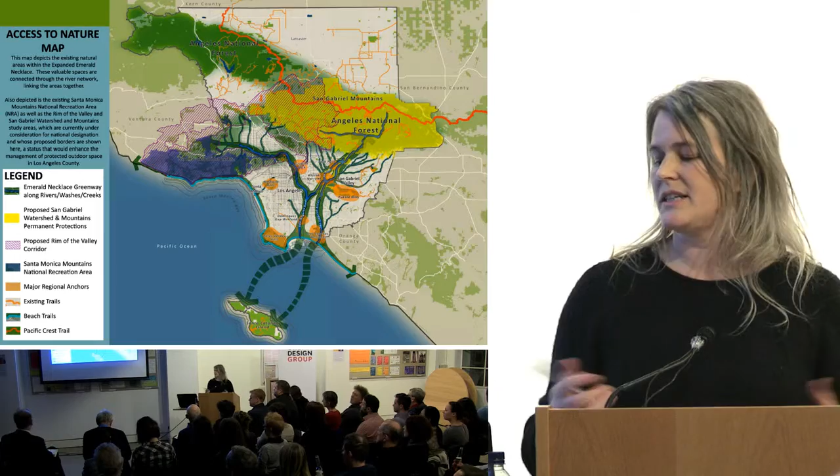This is one of the things we're becoming more involved in: retrofitting natural systems within the city and bringing back into play redundant spaces. This is one of those corridor systems, which is actually what green infrastructure is based on—the corridor concepts that came out of the greenways movement in America in the 70s and 80s, forming critical habitat connections. But green infrastructure now offers a much more expansive concept, tying into mosaic parts including forest, fen, marsh, things that deliver ecological services as well as other benefits.

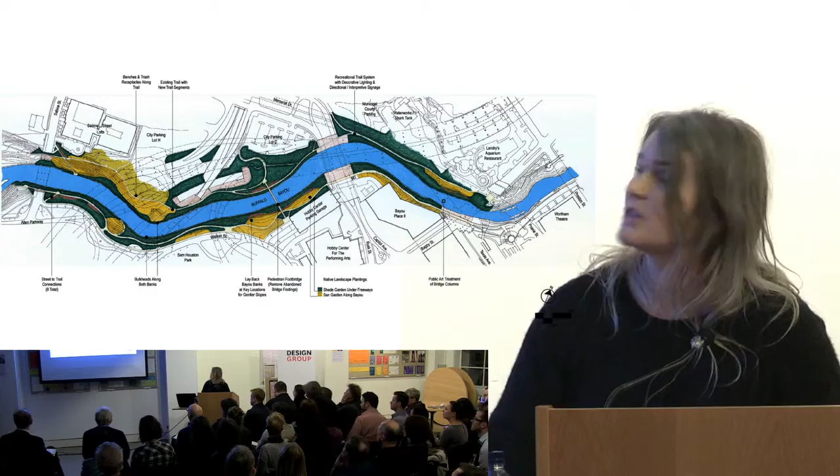In the section they looked at, they regraded all the banks, brought back the riverine and riparian vegetation, turned dead spaces into positive spaces, and connected everything up, working with the local microclimate and the areas that would be shade and the areas that would be in sun.

There's a before and after of how the bayou, the creek, was, and how it is now, with multimodal forms of transit for cyclists and pedestrians, a large campaign of tree planting, and bike trails that take you right into the centre of town. New businesses have opened up, renting kayaks and canoes to people for exploring and recreational and educational opportunities.

That just enables something much more than the sum of the parts, which is a greater response from community and spaces to live out the lives that we have to live.

So just another example, and perhaps an even more extreme example of degradation. This is Turenscape's project in Qian'an City. It's the Sanli River, which had become extremely toxic and degraded after decades of steel industry. The plan shows the three sections of the river—well, it's a spur of the river—as it goes through Qian'an City. And this is what it had become: a wasteland and a rubbish ground.

It's been brought back into play through riverine restoration, ecological principles played out through the whole corridor, enabling new forms of recreation as well as cleansing of water, new meeting places, new opportunities as the river widens and leaves the city. It's something quite astonishing, achieved in just two years.

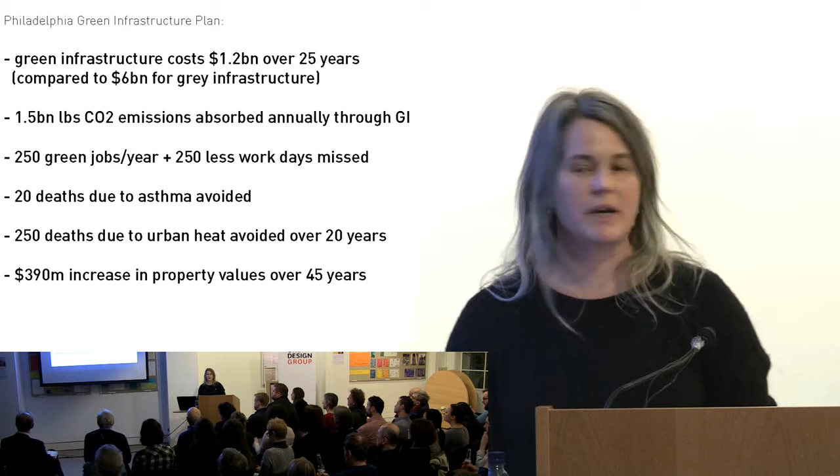In fact, Nesta produced a report about new models of management in 2013. We need to be cognizant of this, because as we plan these spaces, we need to know that they're going to survive.

So one of the aspects is that we're approaching tipping points, and obviously there's always an opportunity in a crisis. This is from the Room for the River project in Holland, which many of you will know. There are 30 projects, all scheduled for completion by the end of 2016. This is one between the towns of Lent and Nijmegen. Nijmegen sits at the bottleneck of the River Waal.

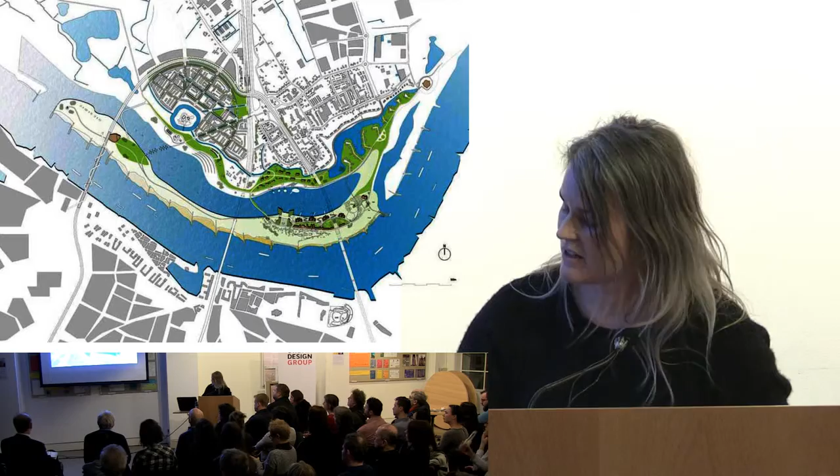So that was the drawing that won the competition, from H+N+S Landscape Architects. And then a visualization of the same. This is happening across the Rhine Delta, which is at that cutting edge, and I think the Dutch have been ingenious in their ability to think about this, plan for it, and absorb these issues. And there it is in construction - they're excavating the channel, and I think it's going to be finished at the end of 2015, this year.

Another example of this is the threat to our coastlines. As you're probably all aware, we're losing salt marsh at quite a significant rate as sea levels rise, and they're set to rise further. One of the things we can do is make other sacrificial acts - we can let land go. That's already happening in the UK with managed retreats. So if we can create new salt marsh, we can actually buffer those tidal surges and storm events, and reduce the velocity of the waves and their height by about 20%.

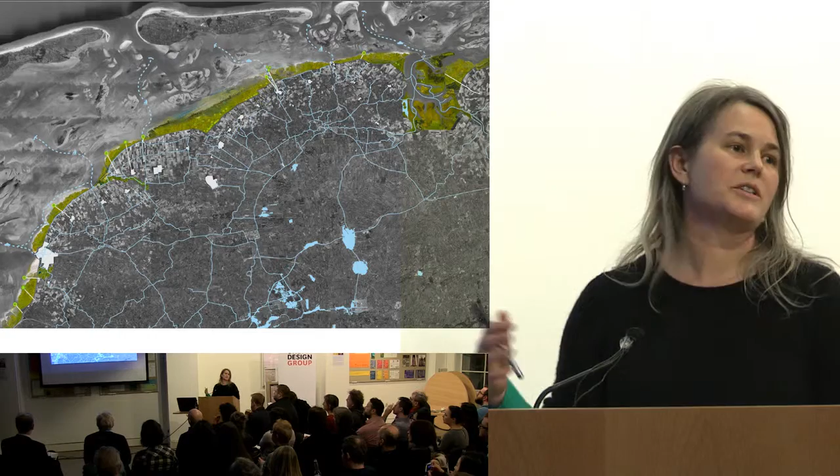But they're obviously not just storm defences. They're significant recharge zones for our hydrological system and networks. They're fish nurseries - it's where fish come to spawn often. But they're also a huge recreational resource.

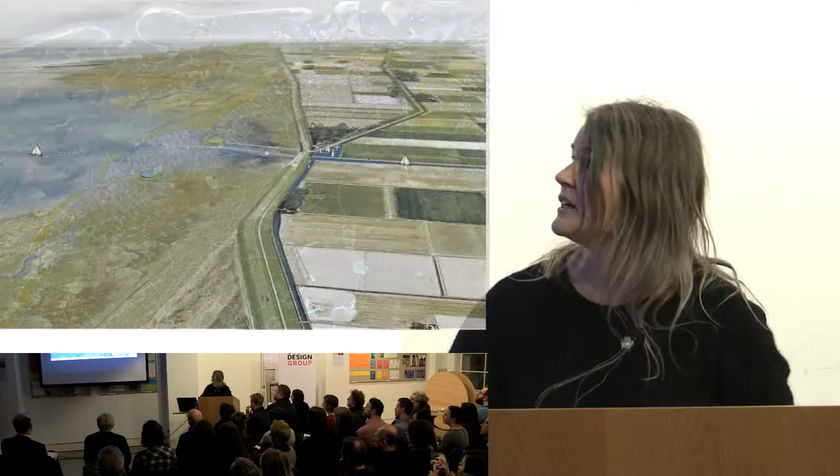So this is on a big scale. This is by Bureau Harrow, another Dutch practice. And that's their vision of that reconstructed salt marsh that provides new protection for the urban centres along that coastline, which is in Friesland.

And then a student project from Christophe Girot's unit at ETH Zurich, where they're exploring similar problems. It's about protecting the delta, but by sacrificing land again, we can make space for the water by relaxing the pumping regimes within the polder landscapes. We can have some kind of coexistence, but it requires giving up something we had before to enable these new models to emerge.

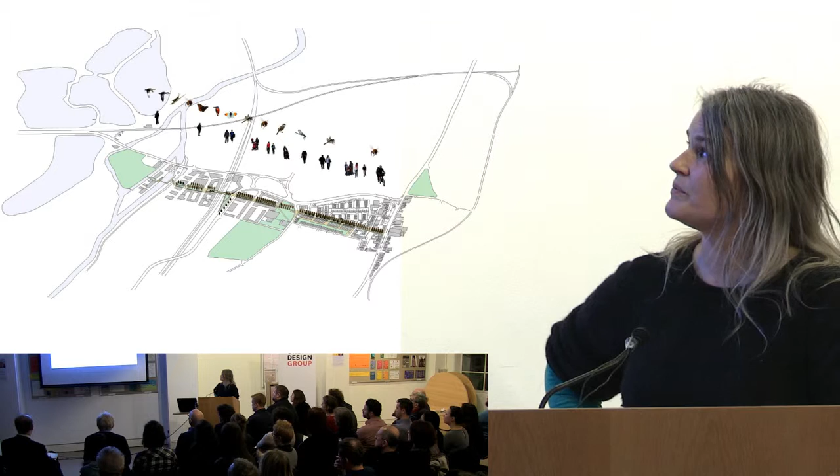So I'm just going to turn to some of our own work. This is a sort of icon of one of the projects we've been doing in recent years. This was for Design for London. It's a connection between Tottenham High Street and the Tottenham Marshes in the Lee Valley Regional Park. The idea was to create a new pedestrian and cycle-friendly route that connected the marshes with the high street and enabled migration of species along that, both human and otherwise.

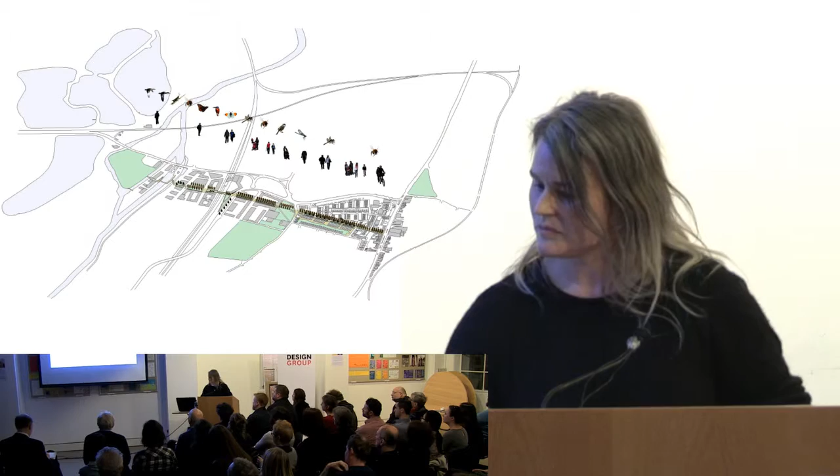But using a system of rainwater collection, recharging that through swales and rain gardens, and allowing that marshland landscape to come up and take a hold on the high street. And what that would create is a kind of river of flowers and a biodiversity chain, which would help pollinators.

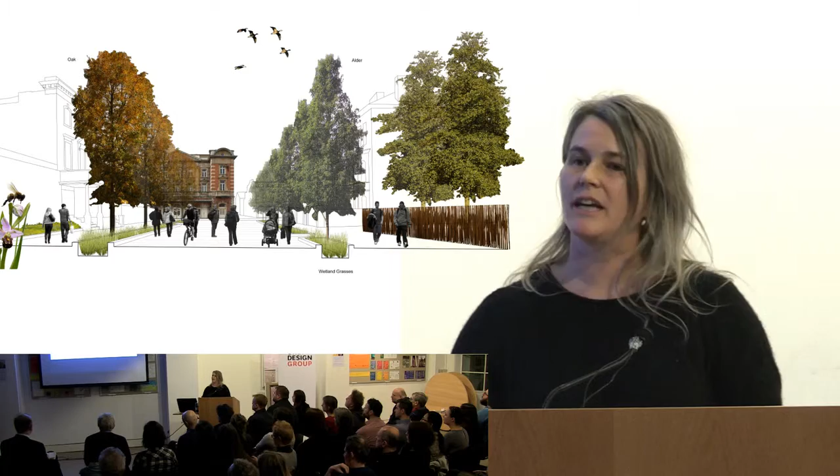And I think this thinking is all underpinned, and that was part of an ALGG project within the All London Green Grid. But all this thinking is underpinned by the rhizomatic structures that probably arose out of the early work of the 1960s of Design with Nature, with Ian McHarg's work, which has informed my generation of landscape architects and has informed the making of the ALGG.

It's a kind of spreading system. It's about creating the connectivity within the city that enables these systems to thrive.

So in an area that we're also working in, Thamesmead in southeast London, which is a former marsh and a flood risk area, we're looking at one of the critical connections between Lesness Abbey Woods and the Crossness pumping station on the riverside, that takes us through an area of 1970s development, which is Thamesmead.

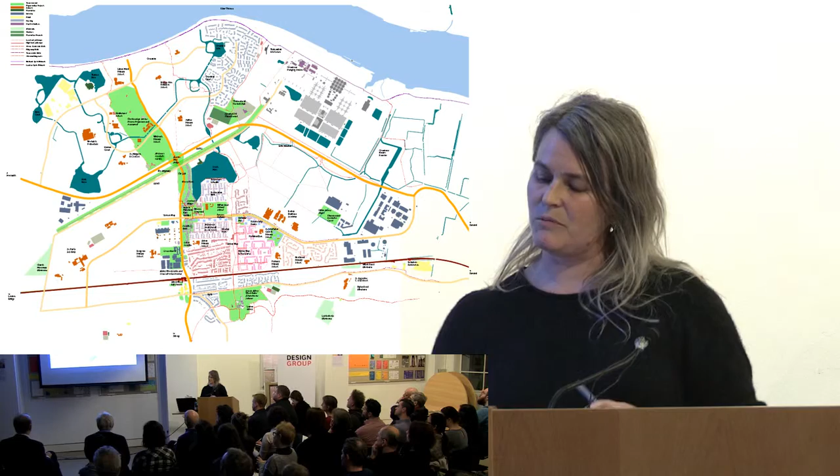This is a kind of mapping of those connections of routes and development, and then the network of open spaces that interconnect with that network of routes.

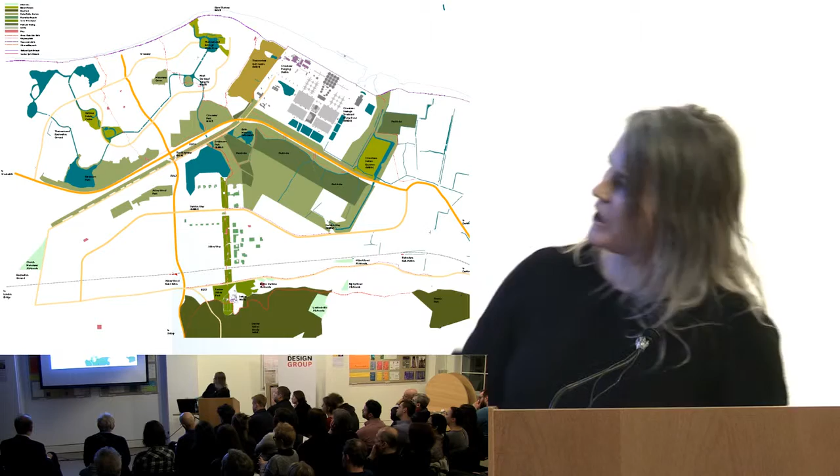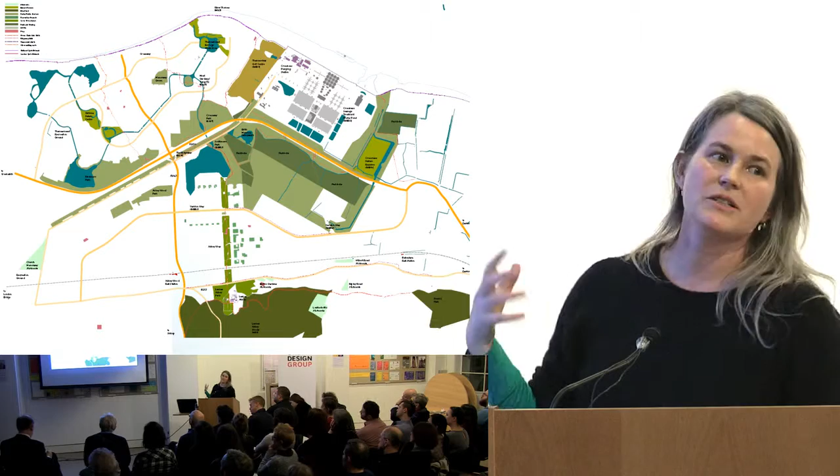We're actually working specifically within this very thin line that goes up to the lake and then crosses the Ridgeway, which is South London's equivalent of the Greenway and Bazalgette's sewer system that links in with the Victorian Crossness pumping station. But this is what we have come to, this route, which is actually an escape route

from the marshes, which goes through the brutalist architecture of the Thamesmead development, which is denuded and degraded. And I think that's what a lot of us are finding, that we're working in these situations where things have just been left and there's no money to manage them or sustain them.

So that we have a damaged landscape with inappropriately planted trees. We have travellers' horses grazing on the site that makes it often unusable for other park users, so it isn't really a park anymore.

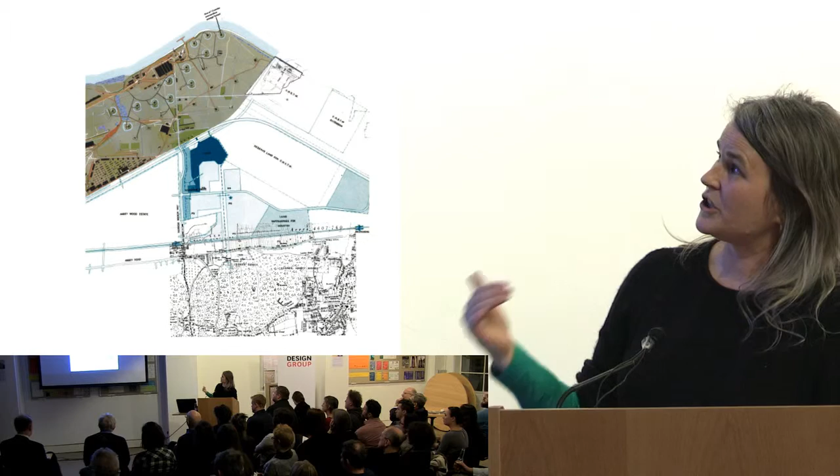And we're also working with time. We're working with the sort of ancient landscape of the woodland up on Lesness around the Abbey. We're working with the old military site from Woolwich Arsenal in the marshes with all the tumps where the munitions were stored. And we're working with the 1970s development of Thamesmead and the Victorian development of the pumping station.

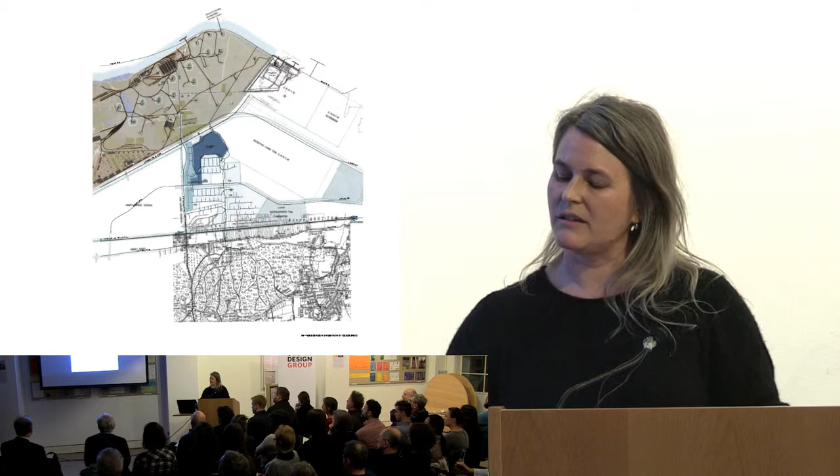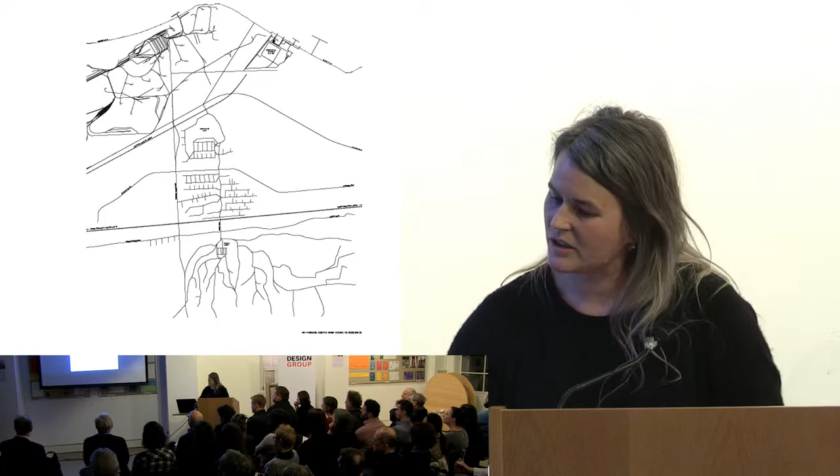And we try to understand that and unpick the system of network of routes and interrelationship between all of those different zones, and draw out of that the essential kind of framework, and then rethink it as a kind of dendritic system that can bring people as well as species along that corridor and out into the wider marshland landscape.

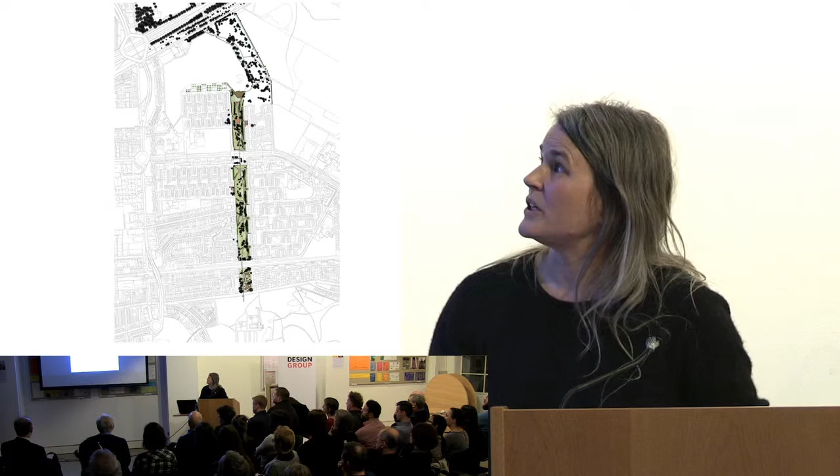And at the moment we're working up proposals. The very tip of this, as it addresses the lake, is about to go on site this week. But we're converting, or we will do when phase 2 is also delivered, about 9 hectares of amenity grassland to

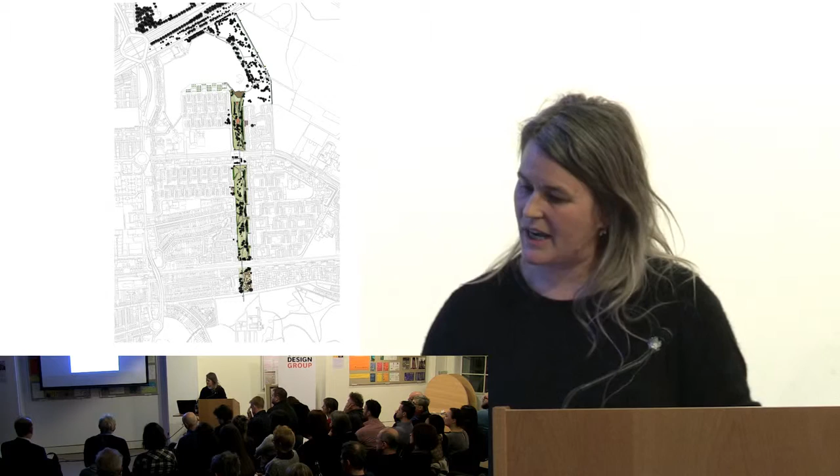species-rich meadow, as well as bringing down the woodland feel of Lesness Abbey Woods, distributing it through the corridor and integrating new access, making it more possible to actually use this space and interconnect with play and other facilities, and a new public square as it addresses the edge of the lake. And that's sort of phase 1 in a rough sketch model, starting to describe those proposals.

And at the same time, we're working with Urban Movement in Brighton. Brighton has been designated Britain's first urban biosphere reserve status through UNESCO, which reflects the amazing wealth of the landscape up on the downs, the countryside, the marine environment, the very particular nature of the chalk downland which sustains all of that, and obviously the city that exists, Brighton and Hove, that mediates those two worlds.

So we're working within that context of a UNESCO Biosphere Reserve, in Valley Gardens, which is the strip of space which reads, as you come down off the A23, feeds down through Brighton and onto the seafront and the pier.

But at the south end we have the pavilion, and also at the north end, St. Peter's Church, which is a Grade 2-star listed building.

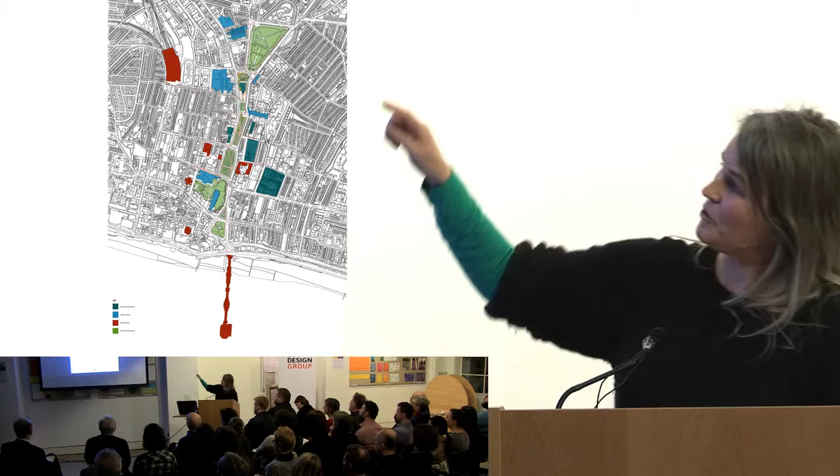And that corridor of space, as it comes down through, picks up the pavilion and past that to the Old Steine and on out to the seafront. So it's about 1.5 kilometres of public realm that we're working with.

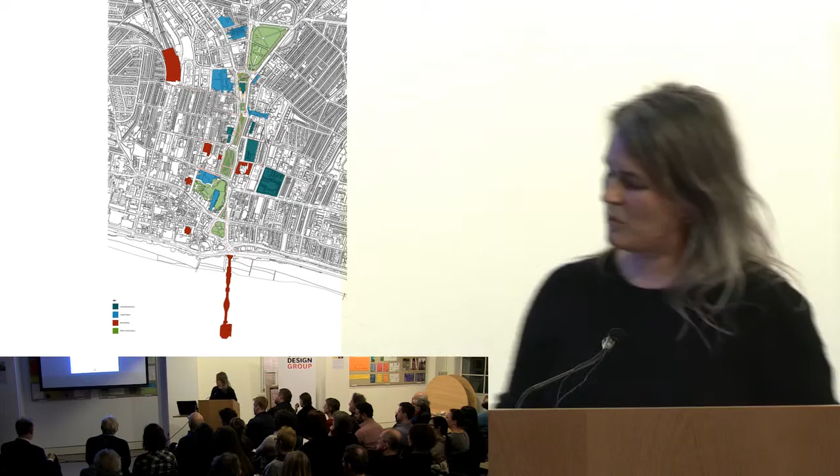This diagram is talking about how things have been severed, how you can't really cross either north to south, east to west, without a whole series of barriers. What we're trying to do, working with Urban Movement, is connect the place back.

It's almost like the fault line through the bottom of the valley. We need to stitch back the east and west side of the city to become integrated through the park system. We need to close down the spaces between the independent garden spaces and make it feel like a linked park system, enabling pedestrian movement up and down, across and along through the corridor.

In searching for the valley, we realised we needed to look at the whole watershed, and we searched for the chalk streams that define that valley system. We found them up on the downs in the spring line emerging from the chalk, but in the valley floor they're not present, because they've been subsumed within the Victorian sewer network. We wondered if that might give a clue to how to start work with what was a marshy landscape, and bring some of that back into the park system.

Those springs were sacralised up on the downs and held to be precious, in the way that they have been held.

Part of the design team included Richard Allitt Associates, consulting hydrologists, who did a modelling study of the whole watershed of Brighton.

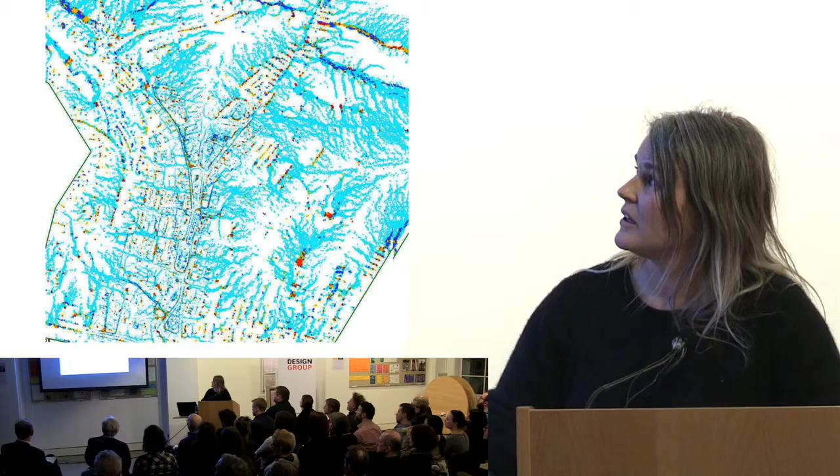It's been raining for an hour now, and the series goes through about 20-minute sequences, so you can see the build-up. Water is starting to gather above Valley Gardens. The yellow is about 15 centimetres deep, areas of pink are about 50 centimetres deep, and you can see it starting to flow down along the roads into the valley.

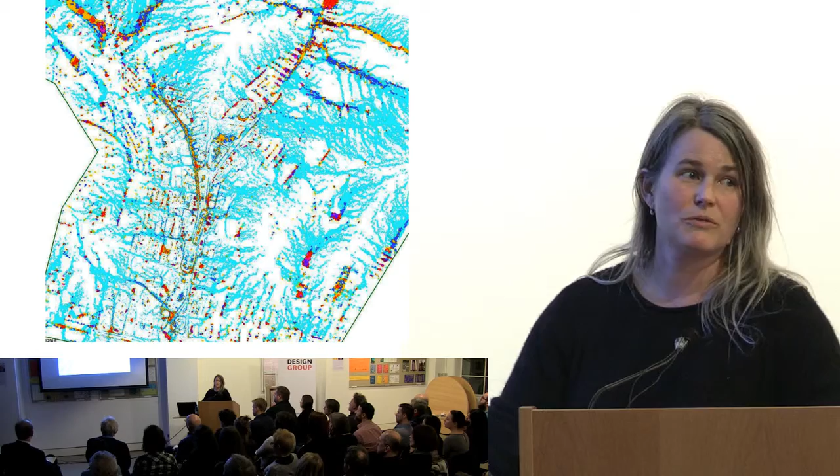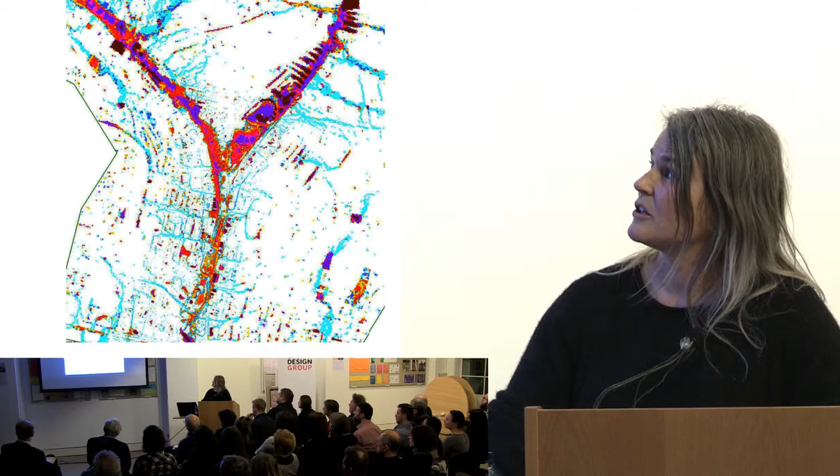The violet is 75 centimetres depth of water, which is beginning to accumulate, and now it's starting to surge. This is all within about a 3-hour period, converging at The Level at the north end of Valley Gardens and beginning to come down through. Where you see patches of brown, that's over a metre. Now I think we've got the full sense of the inundation, and it starts to subside.

What we have, as a result of the work of Urban Movement and ourselves and the whole design team, is a kind of rationalised plan for Valley Gardens, where the street section is closed down on the west side, going from 4 lanes to 2 lanes, taking buses only, and on the east side, a 2-to-3-lane, where necessary, car-only corridor.

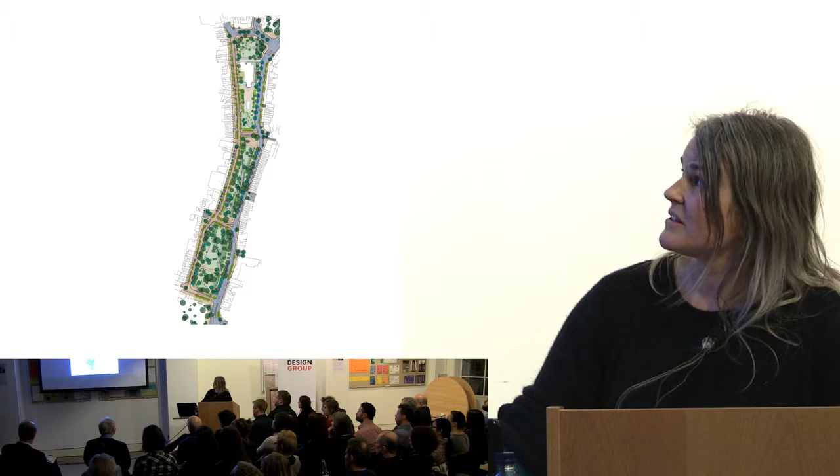That makes more space for streets into which we can integrate new planting, tree planting, swale planting and verges, and make more space for people and businesses.

There's an idea of how that might look outside St. Peter's Church across the east side street section, with widened verges, cycle routes on both sides, off-road, and street swales where appropriate, integrated amongst loading, parking and bus bays.

We've come to this through a kind of layering. We also allowed for an exceedance route which crosses the gardens—it's on the diagonal route coming down. In the worst case scenario, we're hoping we might be able to take water from the west carriageway over to the east and let it go out to sea, avoiding the worst flood risk scenario.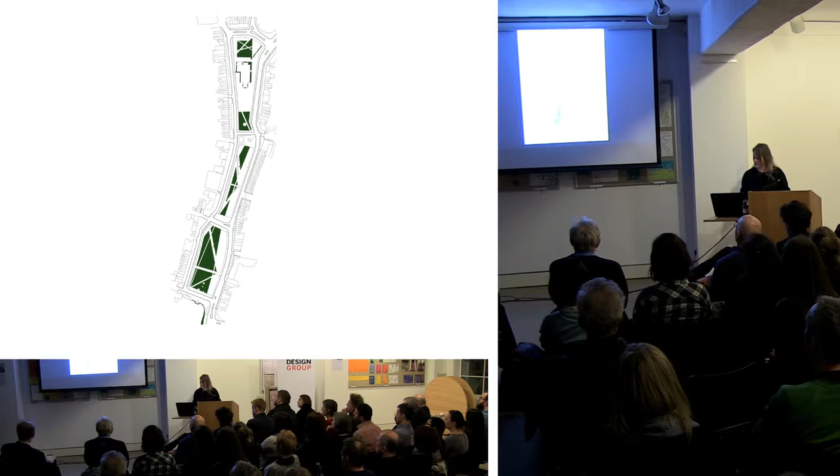So this is the idea of lawns arriving in Valley Gardens, with a route tracking up through the centre, leading from south to north.

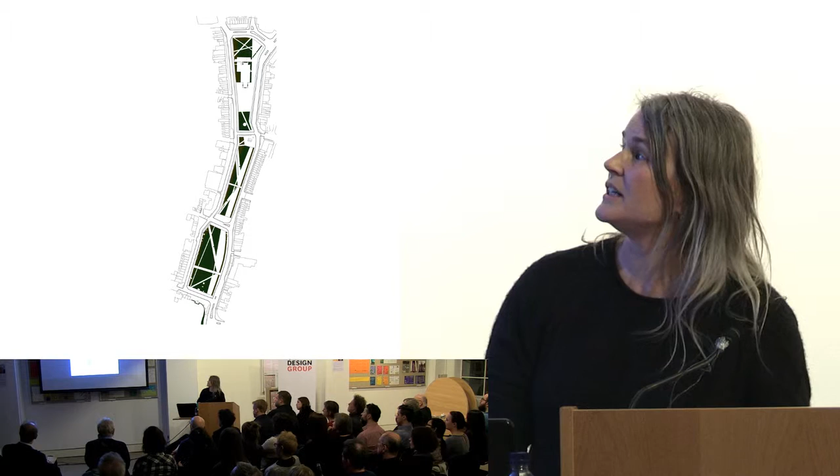To that we add meadow areas, and perennial gardens and rain gardens and community gardens, street swales and water features.

The existing tree canopy is mapped in, part of which is the National Elm Collection, unique to Brighton, which has been able to protect its elm trees from the worst ravages of Dutch elm disease. So we're working with that legacy and trying to plan a new legacy, planting new disease-resistant elms within the streets and the park.

Sorry, that's just jumped. Oh no, it's okay.

Just to pause on that, the benefit of thinking about trees as part of an urban forest is quite broad. They improve land values. They obviously produce oxygen, remove greenhouse gases, and store carbon.

They address the urban heat island effect by lowering ambient temperatures. They intercept particulates affecting respiratory health. They improve water quality, provide erosion control, and also provide physical and psychological health benefits.

So if we're trying to quantify the effects of greening the city and tree planting, we can start to do that by looking at the services they provide.

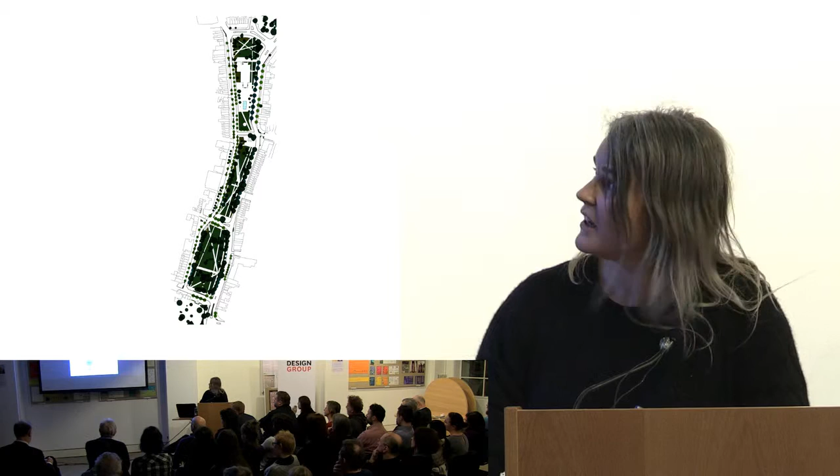Carrying on, into this we're adding the new street tree planting, and then some arboretum tree species as well, thinking of the whole network as a linear arboretum. And then another layer of tree planting follows the idea of the recreated chalk stream as a new feature within the gardens that helps draw the whole thing together.

There's an idea of it coming from the south towards the university, with new layering of trees within the existing structure, and lawns as event spaces as well as social spaces.

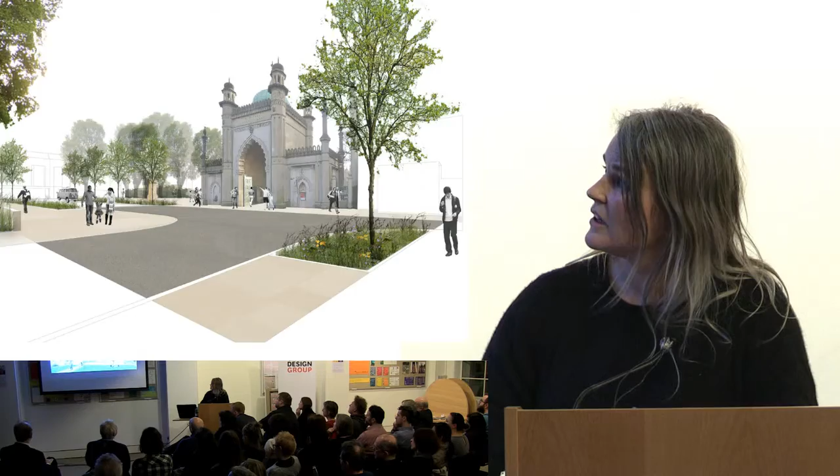A new setting for the entrance to the pavilion with the reduction in carriageway, providing space for planted verges and rain gardens where appropriate. A new public square outside St. Peter's Church instead of a car park.

The Valuing Urban Realm Toolkit, developed by TfL, has been applied to the project, which estimates over a 15-year period an £85 million economic impact.

I would argue that some of that money could be redirected towards paying for parks and maintaining them, and £3.5 million of that would come through health and social benefits from an improved quality of life and environment.

So I think there's a real business case we can apply to our projects that can help demonstrate their viability and leverage finance to help support what seems to ail our urban parks and spaces. We need to find new models to affect that.

One of the things I think we need to look at more, and I know people are doing it, is involving local communities more in the care of their environment.

At Brighton and at Tottenham, we have explored dialogues as partnership models between the Parks Department and other people—for example, interested community groups, and the homeless community who have a night shelter at St. Peter's Church once every week.

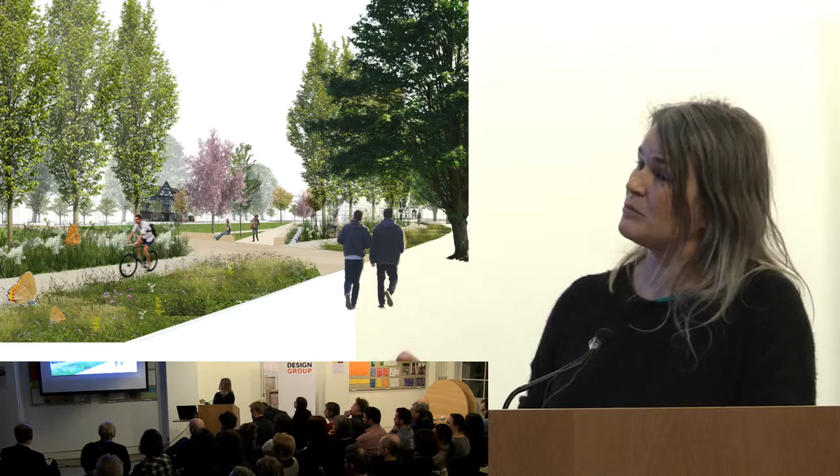One of the key things is the elm collection supports a BAP species protected butterfly called the white letter hairstreak, whose main source of food is the elm, and where its larvae develop.

They also need late season food species through late flowering plants. That's one thing we can provide through swales and rain gardens, for example, and enhanced meadows.

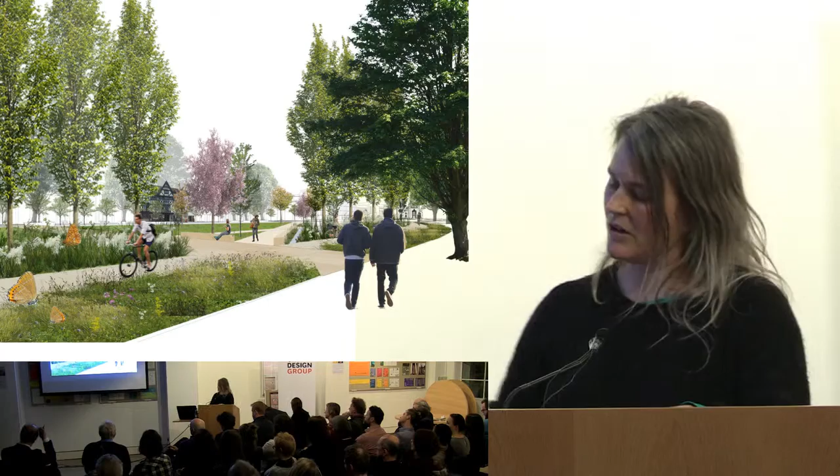And I think that is it. I'd just like to advocate for the integrated approach to public space design where we can. Thank you.